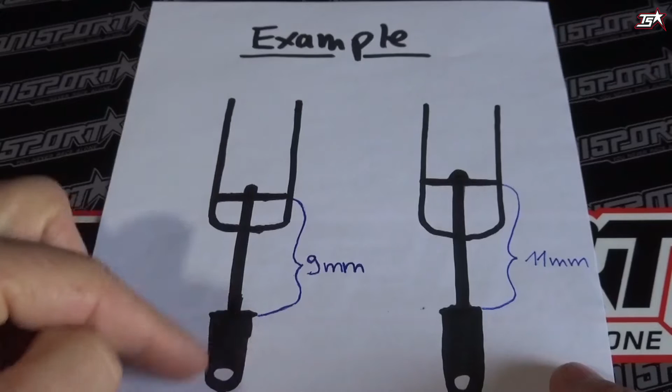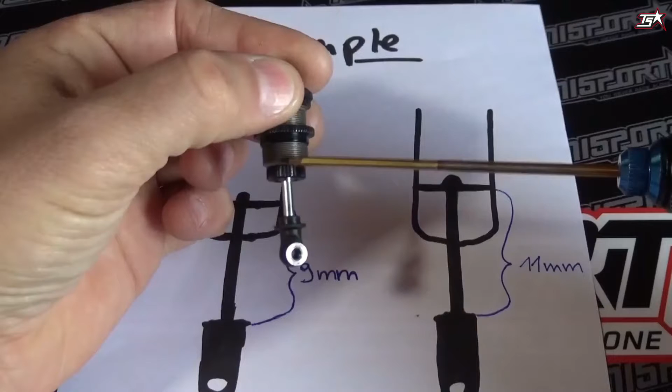Now it's time to look at my drawing. I hope you can imagine this as a shock body, a shock shaft, a piston, and the eyelet, which will be mounted on the arm. All manufacturers, in their manuals, give their own values for building your car. For example, they might tell you to go for 11 millimeters of shock shaft length. When you build a shock, you measure this with your caliper from the bottom of the shock body all the way down to your shock eyelet. So when your manual says 11.0, you build it with a measurement of 11 millimeters.

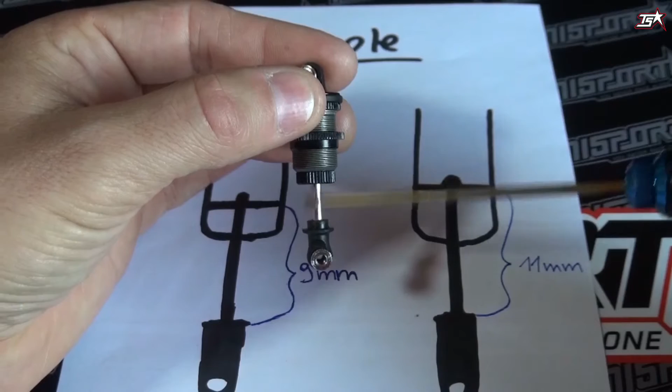Now it's time to explain what a change will mean in this situation. We just have some standard values here - this is a random value. You have a ride height set on your car and a droop set on your car. This will not change when you make any changes to the shock shaft length.

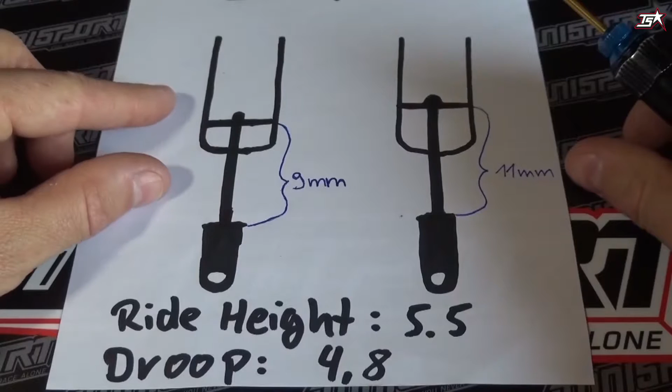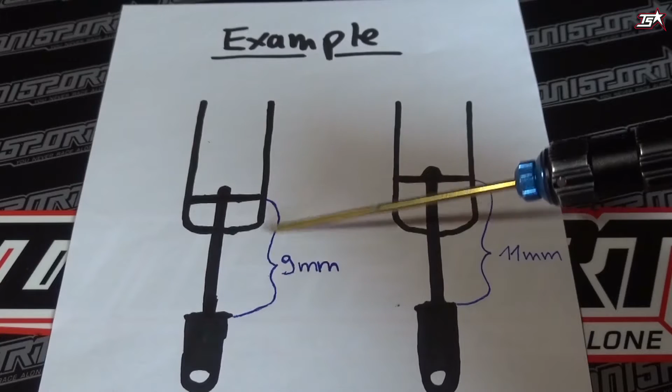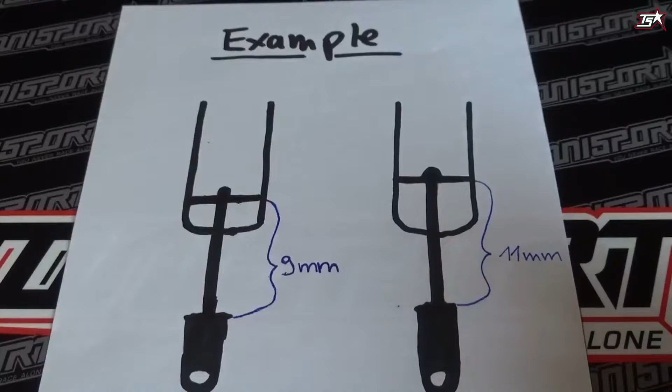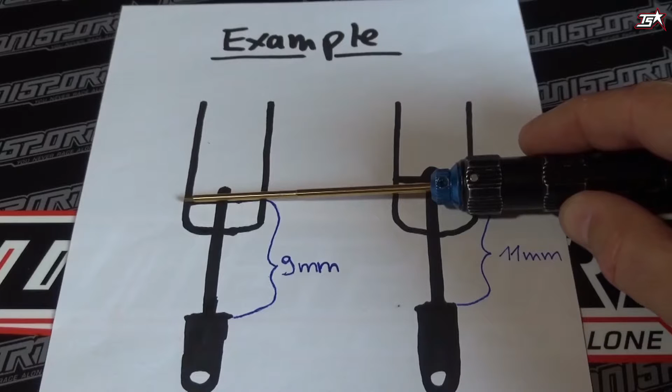So imagine you run with this configuration. You build a shock with a shorter shock shaft, 9 millimeters, and place your car on the track at your set ride height. Then the shock piston will be in some position - let's guess it's exactly this position here - and you'll have an amount of oil above the shock piston and an amount of oil under the shock piston. Now imagine we have a shock shaft length of 11 millimeters instead.

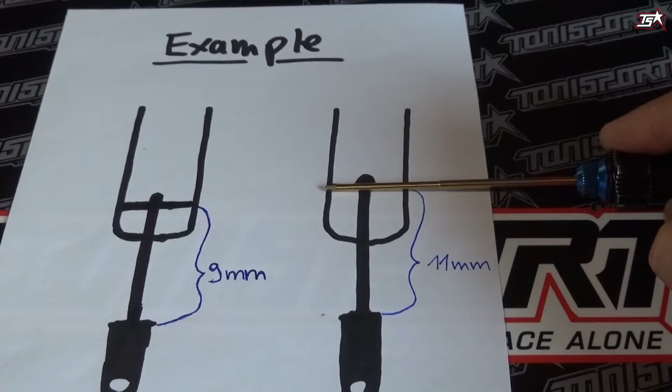So we have a difference of 2 millimeters of shock shaft length. With your car at the same ride height standing on the track, the piston will be positioned 2 millimeters higher in your shock body. This will cause you to have a little less oil above the piston and a little more oil under the shock piston compared to before.

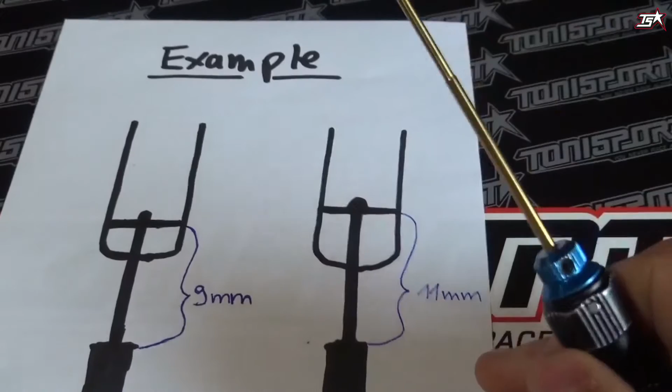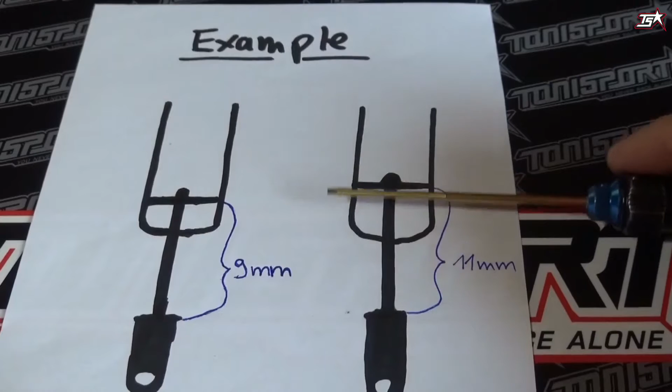So I hope this is all clear for the moment and easy to understand. A change of the shock shaft length will definitely change the position of the piston in the shock body. But what does this really do, or how does it influence your car? I'll try to explain it. This example with a shorter shock shaft is better when you're running on a track with low traction conditions.

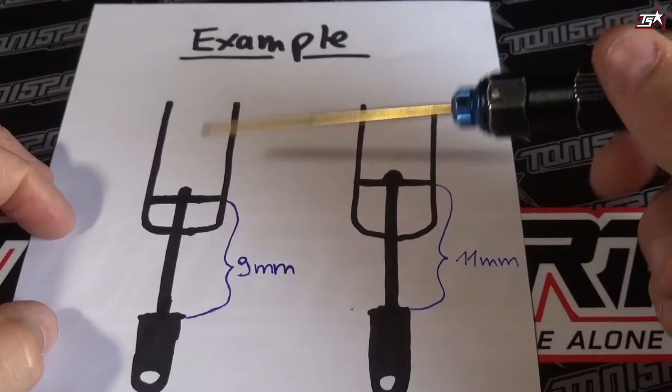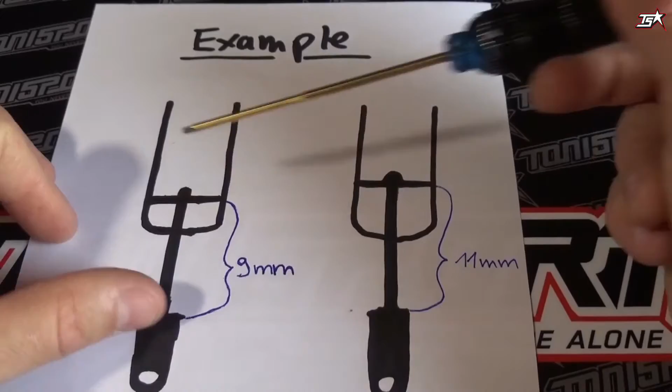Because when you run on a low traction track, it is always good to have a bigger amount of oil above the shock piston, because when your shock starts to work, you will have more resistance, more load or more pack above the piston, and your shock shaft, when the shock is going inwards, will get more pressure or resistance, and this will also transfer more pressure to your tires and give you the feeling of more initial traction.

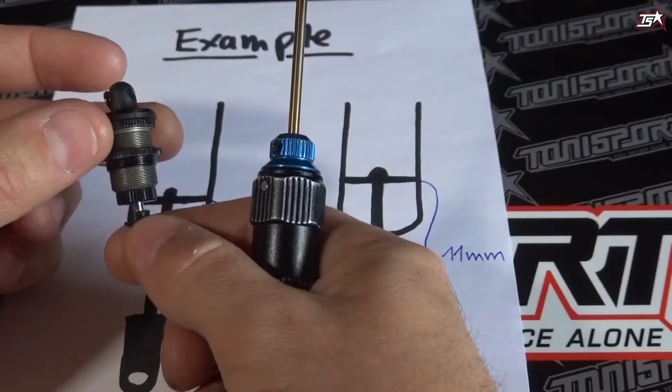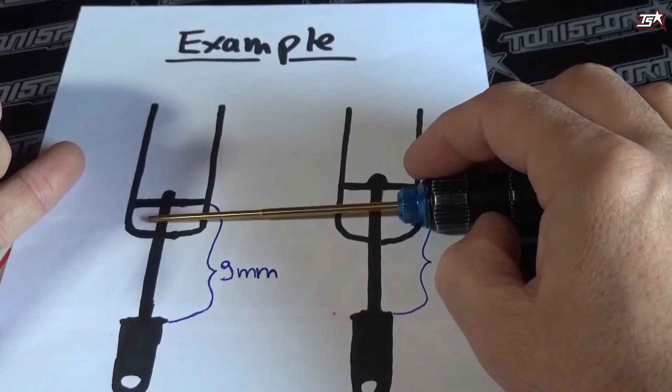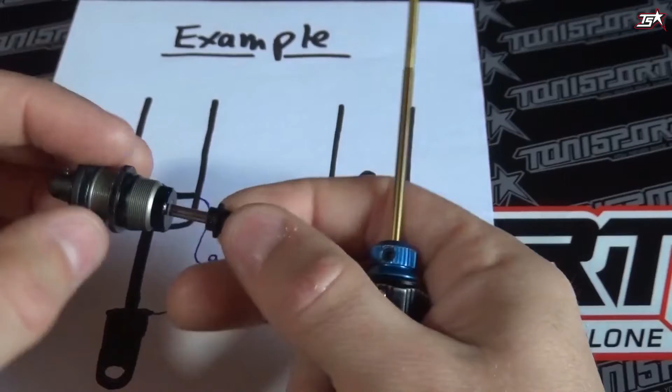On the other side, when the shock is compressed and your car is maybe doing a direction change and the shock wants to come out again, you will then have only less oil under the piston, and this will allow the car to make a faster direction change because there is not that much resistance under rebound, and this combination will be better when you're running on a low traction track.

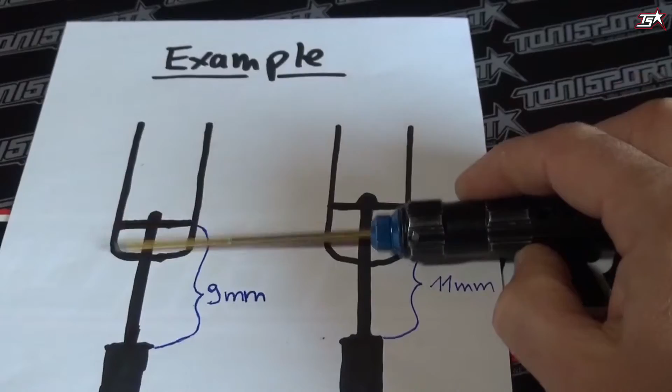Your piston is not that high in the body of the shock. You will have a lot of resistance going inwards, and under rebound the resistance is lower and your car will change direction even faster.

When we now take a look here on the other side, where we have a basic setting of a longer shock shaft and your piston is already a little bit more upwards in the shock body, then you have a little bit less oil above the piston and more oil under the piston compared to this one here.

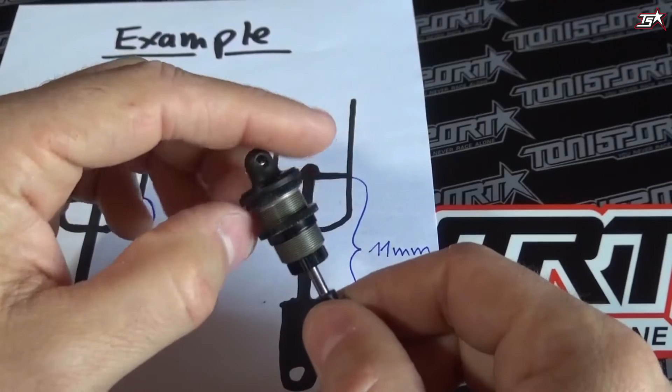This is better in high traction conditions, because in high traction conditions it's always good when you enter the corner and turn in that the shock and the resistance of the oil is not too big. This will make the car not super aggressive going into the corner, and during a direction change or under rebound you will have more pack of oil under the piston, which will slow down the rebound process a little bit, and this will give you the feeling of a smoother car, not so twitchy.

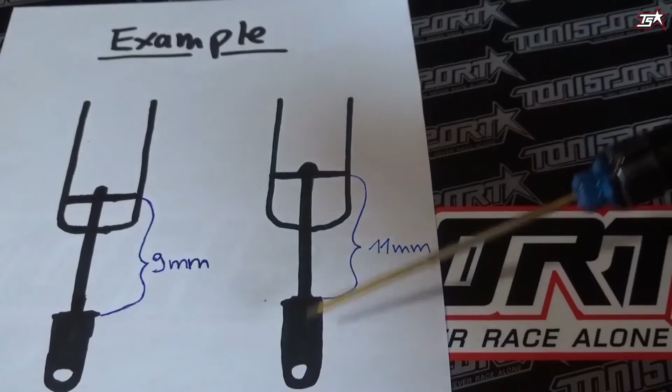So generally we can say a shorter shock shaft is good for a track with low traction conditions, and a little bit longer shock shaft is working better in higher traction conditions.

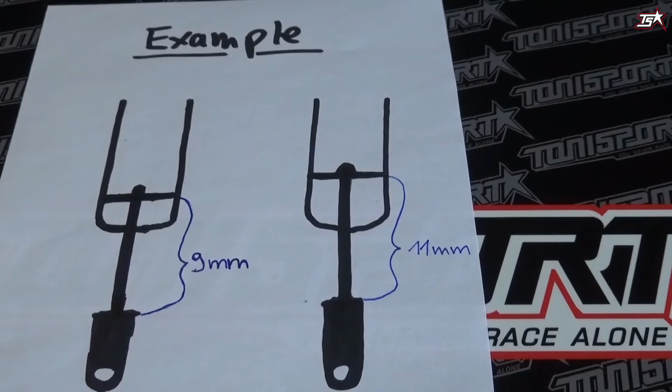I hope this little piece of paper here with my drawing will make it easy for you to understand what I mean. It is a really interesting tuning option, and a lot of the really good guys play around with the shock shaft length from time to time when they have a really good car and a really good setup, trying to get the last couple hundredths of a second out of the car. Then they start playing around with these settings as well.

So it is all about the amounts of oil above and under the piston, and when you are on your racetrack, just try to play around a little bit with these things.

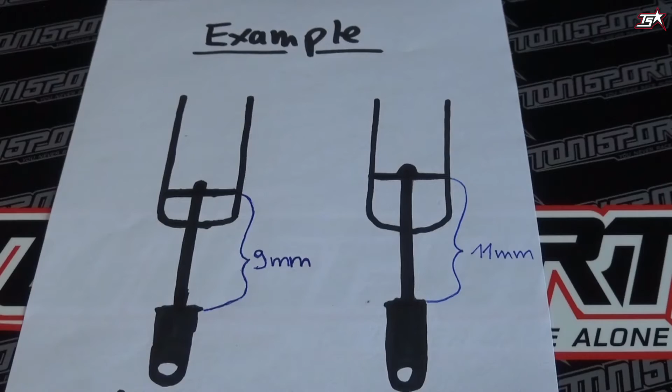Once again, a shorter shock shaft is better for low traction, and a longer shock shaft will work a little bit better in high traction. So give yourself some time to play around with these things, and I'm sure you will gain a little bit more performance out of your car then.

So guys, I hope this little piece of paper was interesting for you. As you see, there's always a little bit more you can try out with your race car. I think all these setup options will never end, and it's really interesting to play around with some small details like that. When you ask yourself now why I know all these things, to be honest, I always read a lot before I do videos.